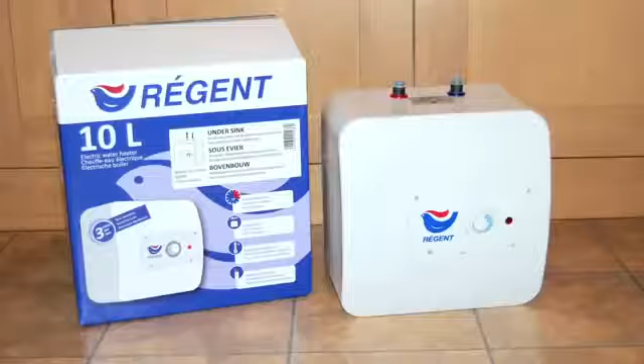We all need small amounts of hot water for washing and cleaning. Loft conversions, cloakrooms, utility rooms, home offices, granny annexes, cafes, and small industrial units are just a few places where Regent electric water heaters can be installed.

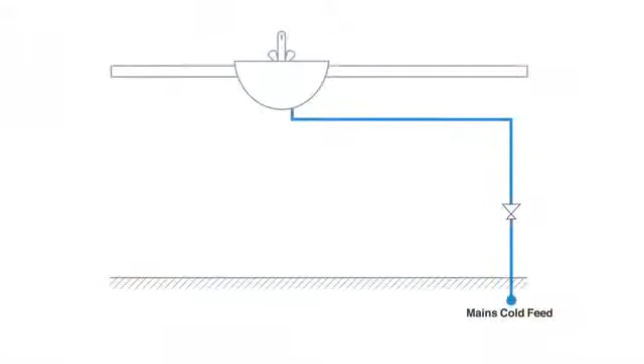The Regent water heater is of the unvented type, and this means it's designed to be connected directly to a mains-fed water supply. The Regent water heater is powered by a 13-amp outlet. No special taps are required, and the hot water produced is supplied at equal pressure to the mains water supply to the water heater.

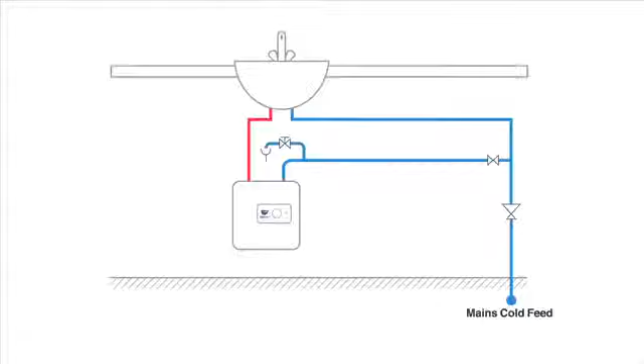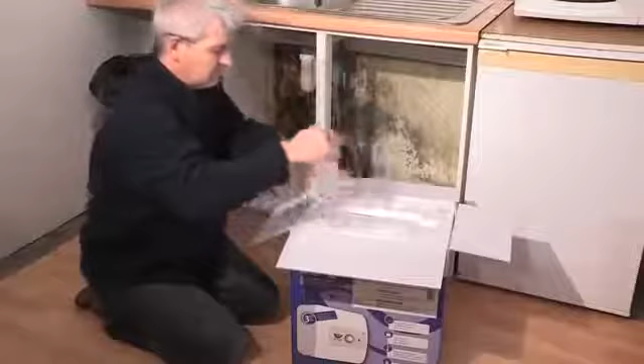The Regent water heater is under sink, so it can be housed in a cupboard. Alan is going to install the water heater in an existing kitchen unit within a stable block that currently has no hot water. So just how simple are they to install?

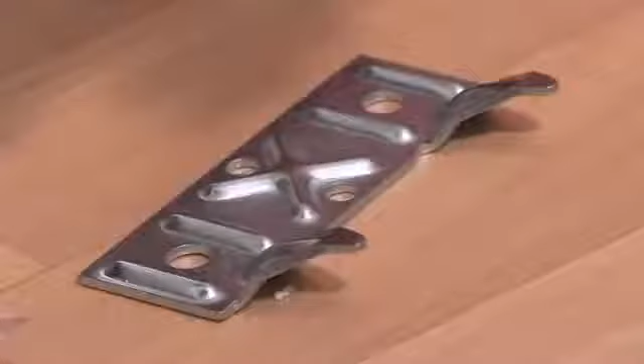Each Regent water heater is supplied with dielectric couplings. These protect the unit against corrosion, a wall mounting bracket, and a pressure relief safety valve. The water heater is pre-wired for the final electrical connection.

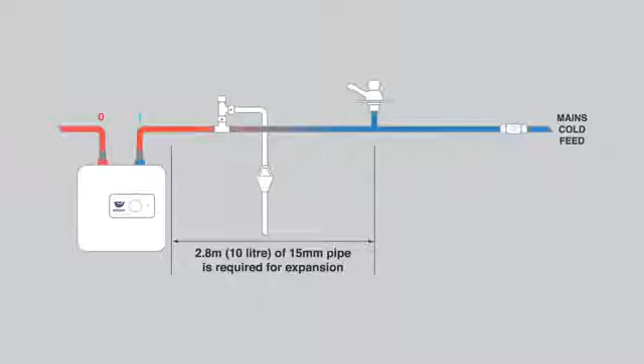UK regulations currently permit unvented water heaters with a capacity up to 15 litres to accommodate any expansion in the supply pipework. However, this depends on the proximity of the water heater to the cold water draw-off, and an expansion kit or pressure-reducing valve may be required. These are available separately.

After familiarising yourself with the installation book and clearing the site, the first step is to turn off the mains water supply. Next is to tee into the water supply for the connection to the Regent water heater.

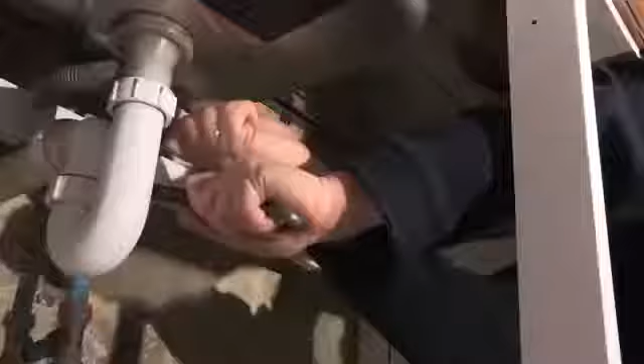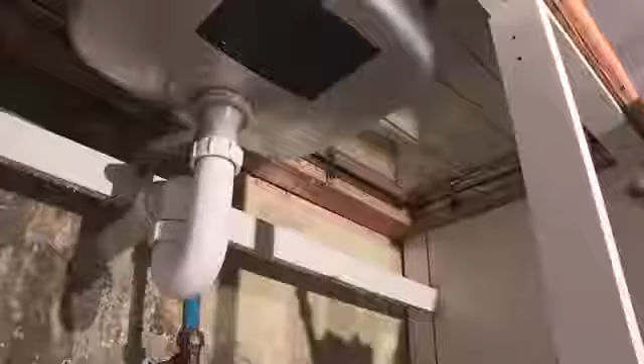Here, Alan has prepared a new section of pipework with a T and isolation valve. It's important to use a valve that will not prevent reverse flow, such as the ball valve shown here.

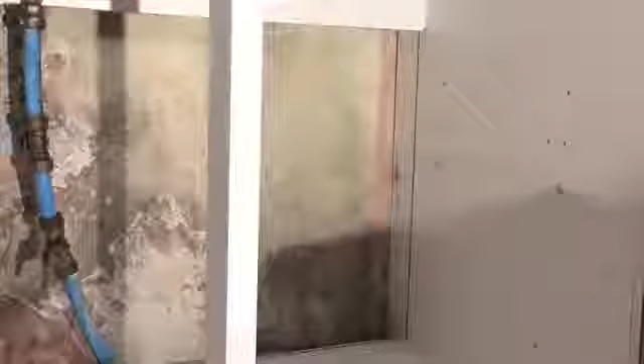Next, Alan is going to position the water heater in situ and mark the wall for fixing the mounting bracket. It's important to ensure the surface is suitable to support the water heater and weight of water.

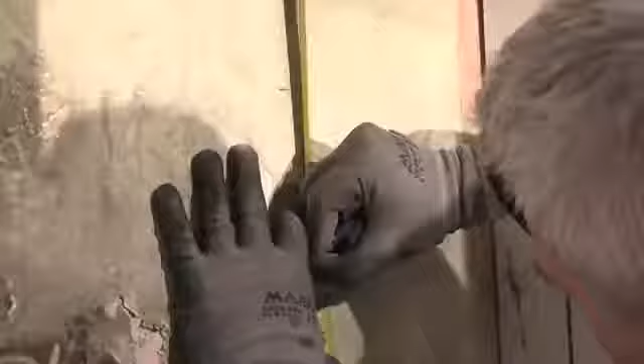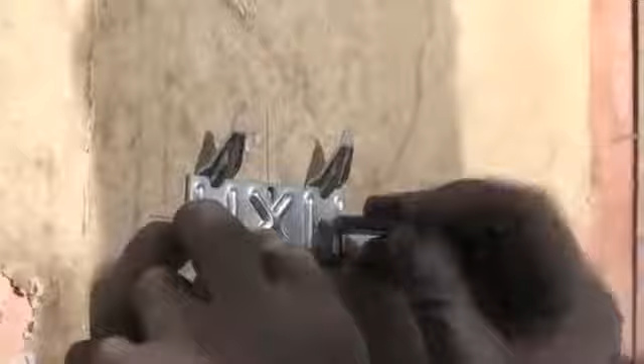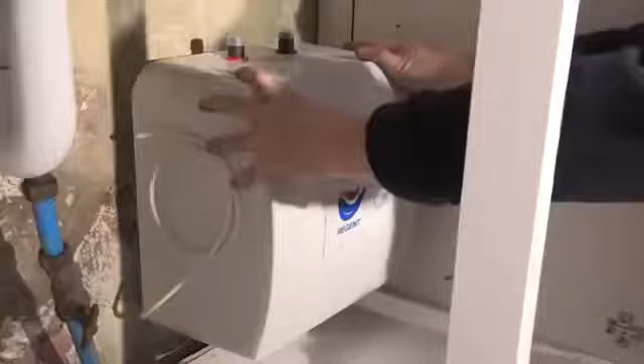Once the wall mounting bracket position is level and marked, make holes in the wall using an appropriate drill bit. Insert appropriate fixings for the wall type and screw the mounting bracket into position using suitable screws. Offer the water heater onto the wall mounting bracket and push down. Once secure on the bracket, remove the protective caps on the inlet and outlet.

The next step is to work out the position of the pressure relief safety valve. This has a discharge pipe that needs to be run to a safe location outside. To do this, Alan is going to temporarily screw on the dielectric coupling and female elbow to the inlet of the water heater to assist in marking the position for the discharge pipework.

Once the position has been marked, Alan has taken the water heater off the mounting bracket to make the hole through the wall for the discharge pipework. As the 15mm discharge pipe is passing through the wall, it is best practice to sleeve this using a larger diameter tube. Here, a section of overflow pipe has been used.

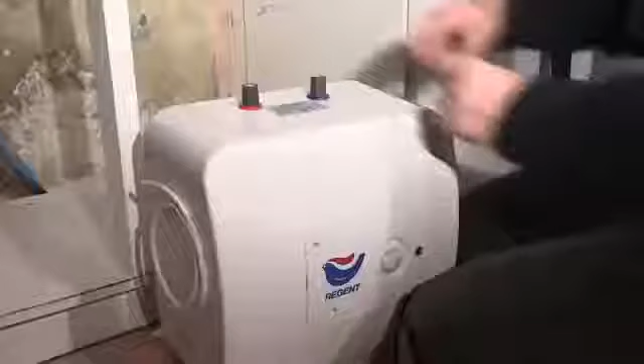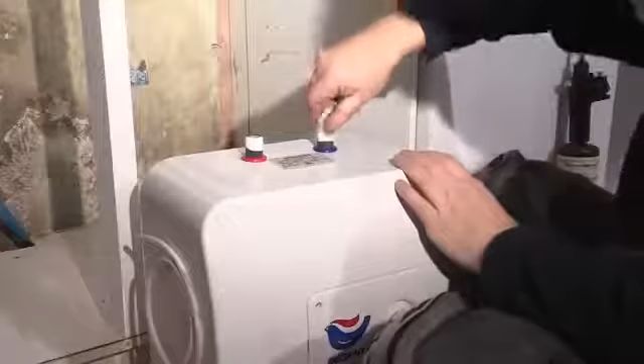Next is to prepare the Regent water heater for the plumbing connection and fit the dielectric couplings. The male half-inch threads on the water heater need to be generously wound with PTFE tape. Then screw on the dielectric couplings to the inlet and outlet of the water heater.

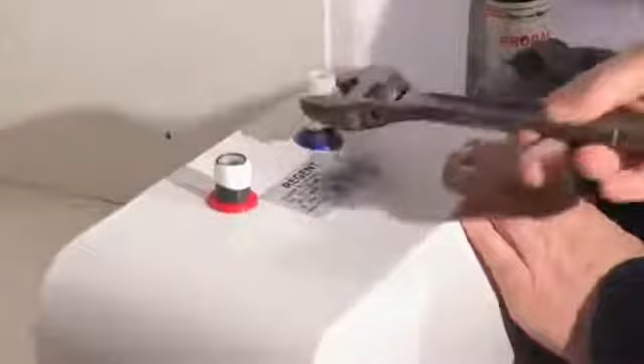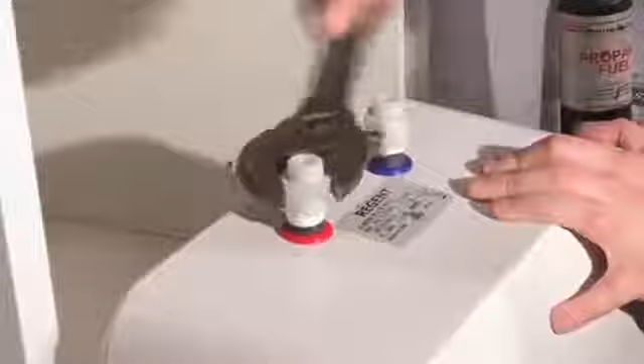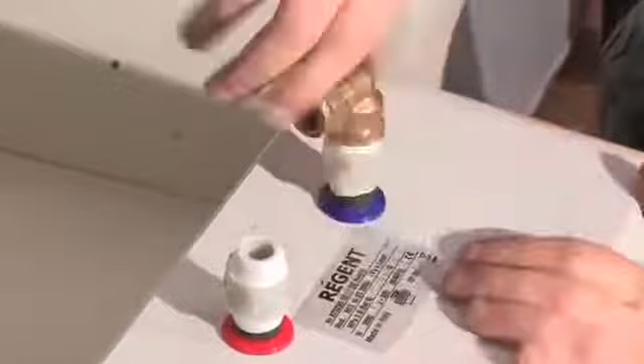The half-inch male threads of the dielectric couplings then need to be wound with PTFE tape, and then a half-inch female connection can be added. Alan is using elbow versions here. Once the connections are in position, locate the Regent back on the wall mounting bracket.

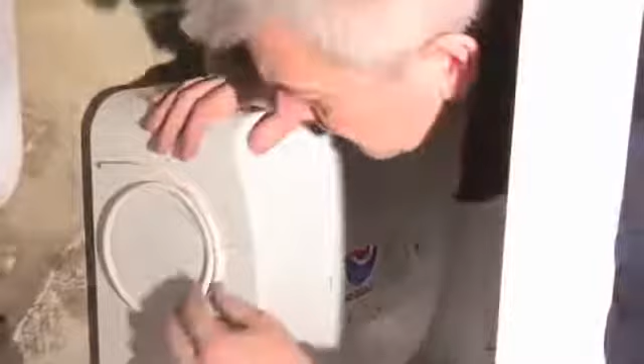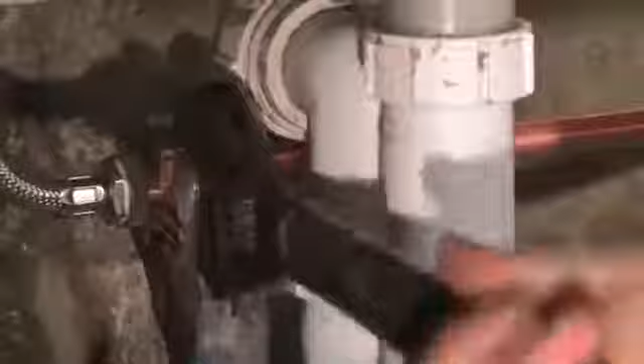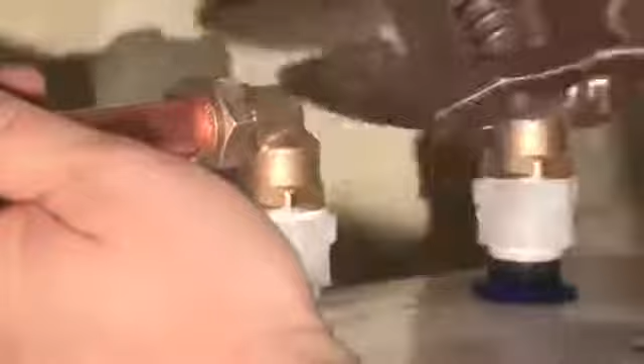Next, Alan is going to connect the pipework to the hot outlet using a section of 15mm copper tube and a suitable braided hose flexi-tap connector. In most cases, the Regent water heater can be installed without any expansion controls, as long as there's nothing to prevent the reverse flow of water and that this expansion water does not enter the feed pipe to a cold draw-off.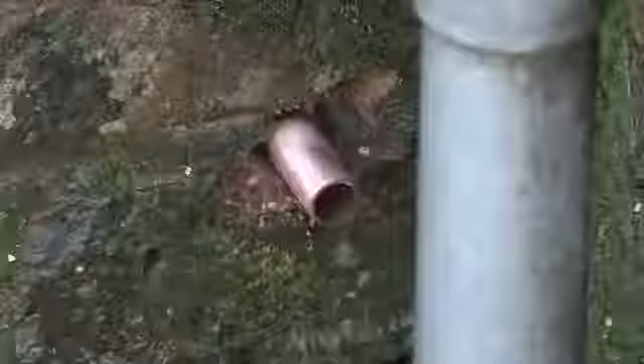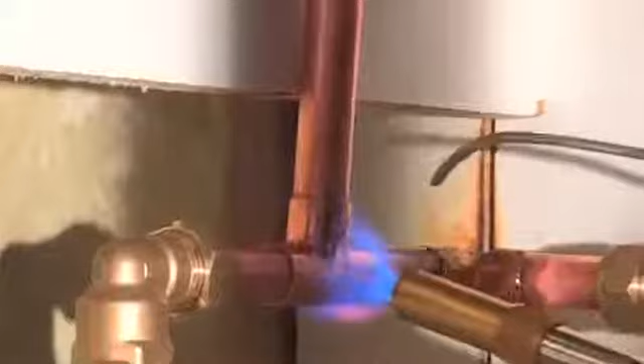Now to complete the pipework and connect the discharge. Alan is using end feed solder fittings here, but it's possible to use compression fittings too.

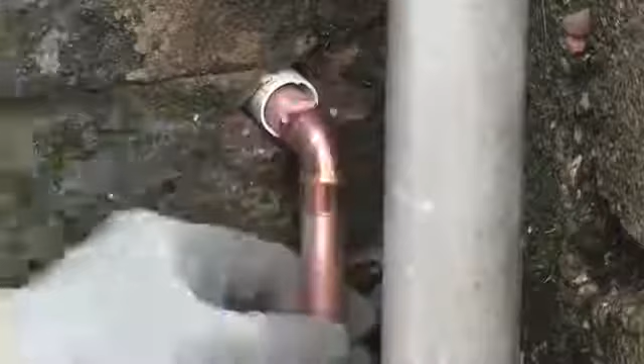The discharge pipework must have a continuous fall and terminate in a safe position. Alan has extended the pipework to discharge into an existing gully.

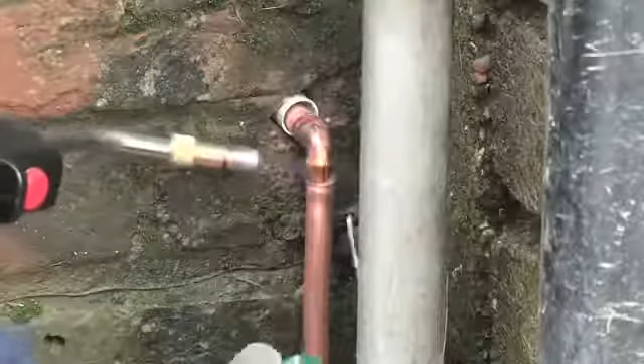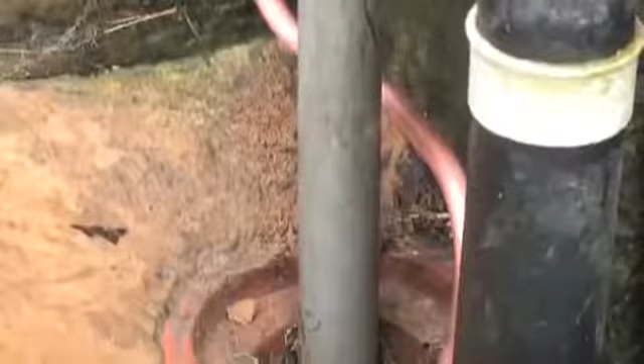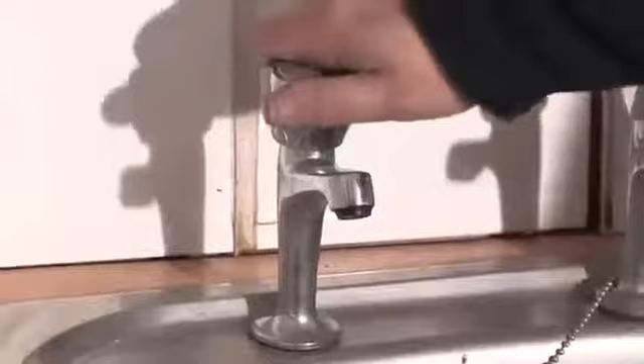Now the pipework is finished, Alan turns on the isolation valve. Next, Alan turns on the hot tap and allows any air to pass through. The electrical connection is via a 13 amp spur. In most cases, a standard switched fused spur is sufficient. However, due to the location, Alan has opted for an RCD version for additional protection.

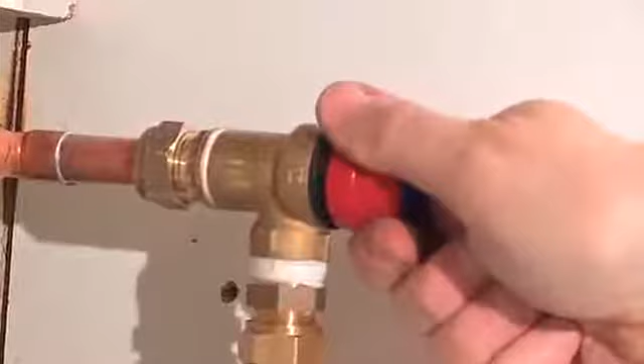To start the commissioning process, Alan first checks for leaks. Next on the commissioning list is to check the operation of the pressure relief safety valve and confirm that water is discharged correctly and safely.

Switch on the electrical supply. The temperature adjustment knob is set to the E position for maximum economy, and then Alan allows the Regent water heater to heat up the stored water. Once the heating lamp on the fascia panel has extinguished, the hot water has reached the desired temperature. Alan opens the hot tap once more to confirm that the hot water is available. Finally, demonstrate to the user, and the installation is complete.